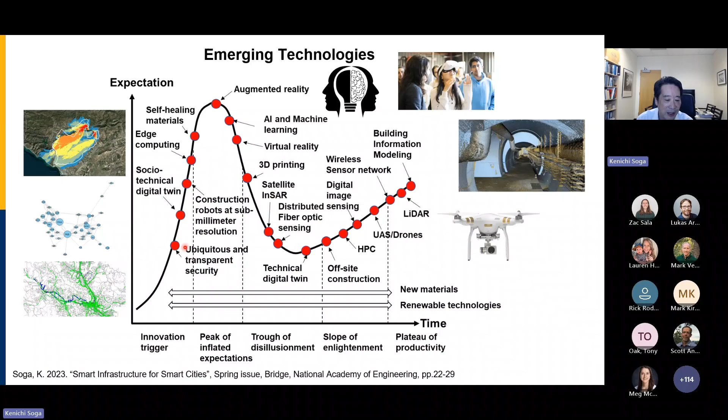Movement is something geotechnical engineers really want to know. Over the past 15 years, technology involvement like computer vision, LiDAR, and UAV gives you precision in the area of sub-millimeter to millimeter. Satellite gives you 10 to 20 millimeter, and fiber optic sensing, which I'll explain more, gives you about 10 microns to 1 micron in terms of strain.

And then we have WSN, Wireless Sensor Network - these are companies that spun out from our research group. You can see a variety of sensor systems that came out, but it's really about continuous monitoring at difficult-to-access sites. As you can see, these are the precisions that really matter in geotechnical engineering. So the technology has really come to the level that we can use it.

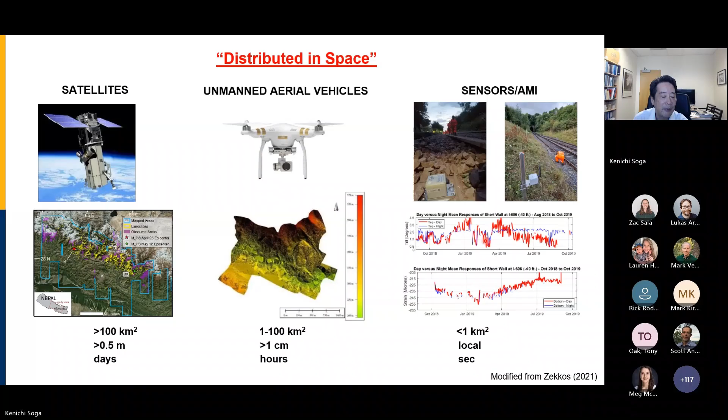I know BGC is working on this all the time in terms of distributing data in space - satellite, UAVs, and sensor or advanced metering infrastructure is what we do. This is from my colleague, Professor Zekkos, and you can see we go across different scales. For example, this is a wireless sensor technology we spun out 20 years ago.

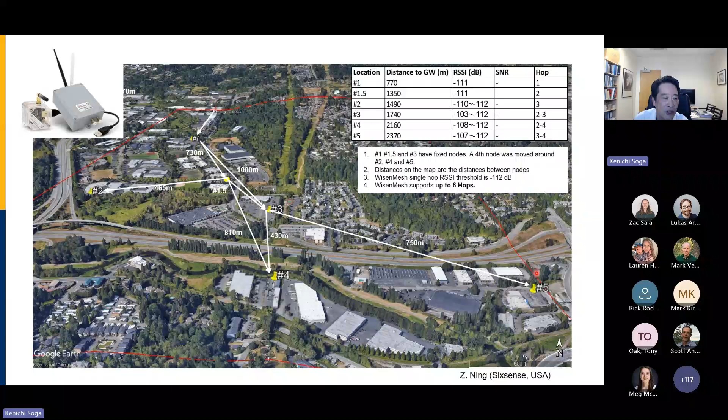And now it has come to a level that you can have a mesh network like what you have in your home with your Wi-Fi mesh network, but at a really larger scale in terms of hopping for kilometers, and you can cover a large distance using LoRa technology.

And the technology is really about bringing low sampling, but sometimes you need the data very quickly. So it's about distributing in time, distributing in space. In many cases, low sampling data rate is good enough.

For example, these are our systems where you have a battery, something like this. If you take hourly readings using a D cell battery in a mesh topology, theoretically, with a good battery, it should last for 20 to 25 years. This is where we spend a lot of time trying to make these devices really low power.

But sometimes you need a very fast sampling rate, like acceleration, noise, and wind. For example, the device over here uses vibration energy and scavenges that to get the energy to send signals.

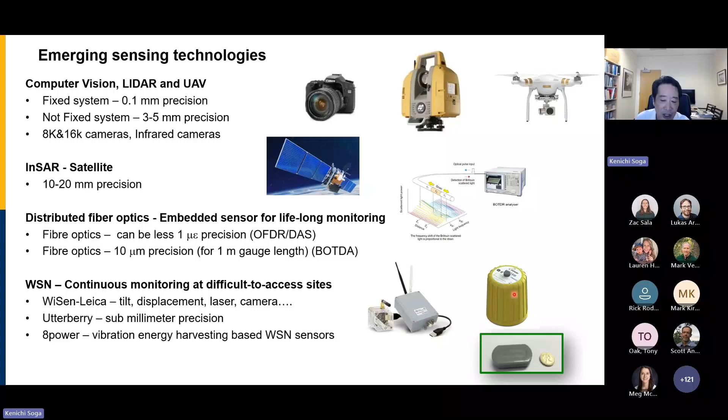But sometimes you can have a device that triggers when necessary—you see a little bit of shaking, and it allows you to trigger. That's how we save and try to get the data sets, because if you take a reading with very high frequency continuously, the battery will only last for a few days.

The question is which data is more important relative to the other, and how do you combine this data together? Machine learning allows you to look back and forth and figure out what is the most important one and how to combine this data set to look at the geological condition, for example.

How do you minimize the ground deformation? How do you make sure the building is okay? How do you run the machine autonomously? These are things we're working on. In the Rankine lecture I show several cases of this, but I don't have time today—have a look if you're interested in that particular part.

Now, in terms of monitoring, what is the value? There are two approaches. Approach one is our traditional way: set a safety margin, managing safety by snapshots. So we always do factor of safety or probabilistic analysis, based on an assumed failure mechanism.

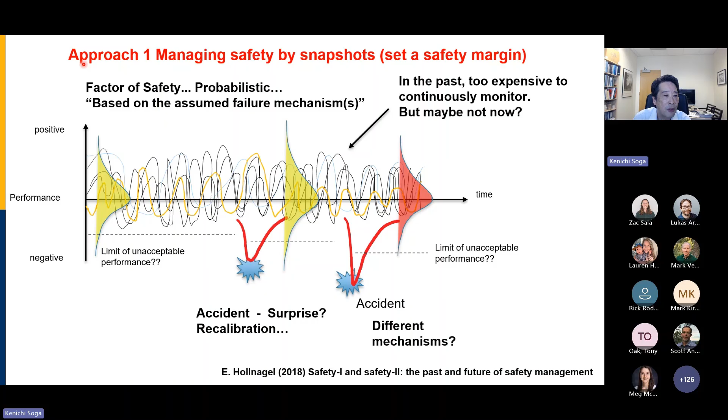However, in the past, it was too expensive to continuously monitor, but maybe not now. This is what approach two is about: managing safety by everyday work, real-time monitoring. It really comes from Professor Hollnagel, who works on safety management for hospitals, nuclear power plants, and similar things.

Approach one is the more classical one, but approach two is about monitoring, learning, anticipating what's going to happen, and responding quickly. In other words, you keep monitoring—you may see some signature of an accident starting to happen, but you can stop it, making proactive management of your infrastructure.

So if you know the actual performance—this is really about monitoring and knowing the actual performance—you learn how to respond quickly if an event begins to unfold. You manage future unknown demand by reducing unknown risk.

You may see something like climate change start to happen, something we didn't think about during the design stage, but it allows you to adapt and identify potential improvements in design and construction. If you know the actual performance, you can improve the way you do design and construction, so you have more economic infrastructure.

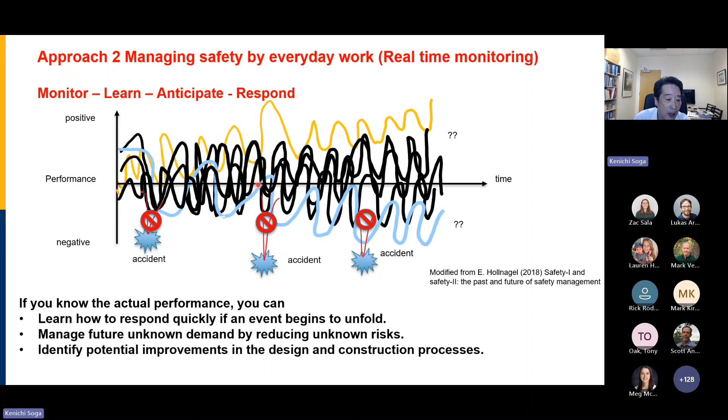And finally, it may lead to circular economy, resource conservation, component reuse, and sustainable design—in the sense that at end of life, can I reuse my piles because they're still useful for the next generation of building coming up.

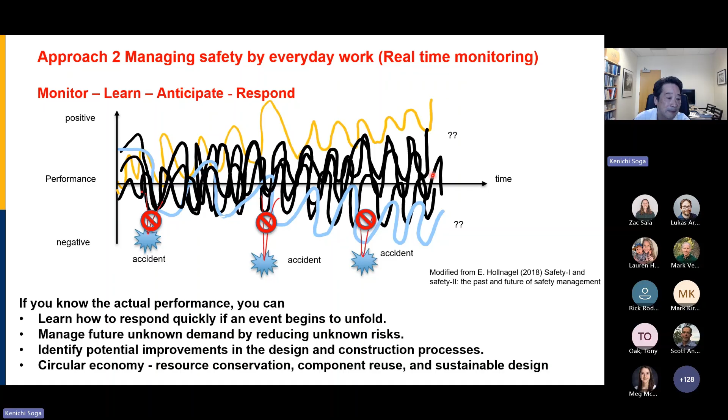Now, when we talk about measurements, we talk about Peck's observational method from his ninth Rankine lecture. I'm not sure you've read it, but when you read it very carefully, you start to realize Peck's observational method is not just about observation. He has a design philosophy behind this, and I want to go through it a little bit carefully, because I think it's a very important concept that we should understand, what the formal observational method is about, what Professor Ralph Peck proposed.

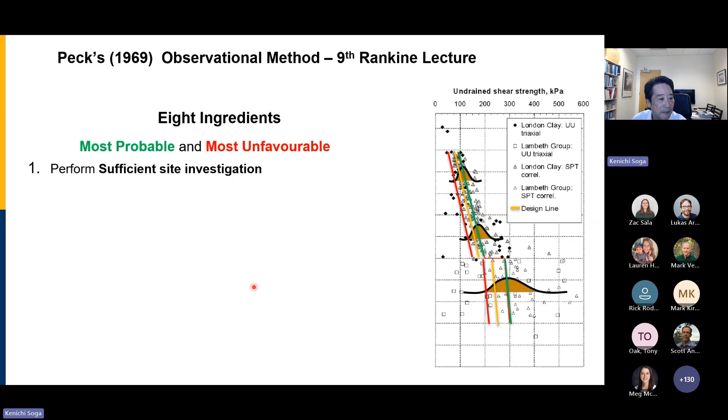Professor Peck doesn't use that yellow line. He says perform a sufficient site investigation, assess the most probable and most unfavorable conditions, which is green and red, and then establish a design based on most probable anticipated behavior. So he's saying use the most probable parameter and then start thinking about your 50-50 and design based on that. Obviously his interest was deep excavation, temporary structures, but that's what he said. Do that, and by doing that you save materials because you have a more proactive design.

You do a design based on most probable, then select the monitoring parameters and calculate the anticipated values. That is your 50-50 anticipated values. Then calculate values based on that design for the most unfavorable condition — what is likely to happen. Then you have a design option B that allows you to proceed if your design A starts to go wrong, and what kind of things you need to add during construction so you'll be safe. Then you monitor and evaluate actual conditions, modify the design to suit actual conditions, adopt design B if necessary. So this is the observational method that Professor Peck utilized and proposed.

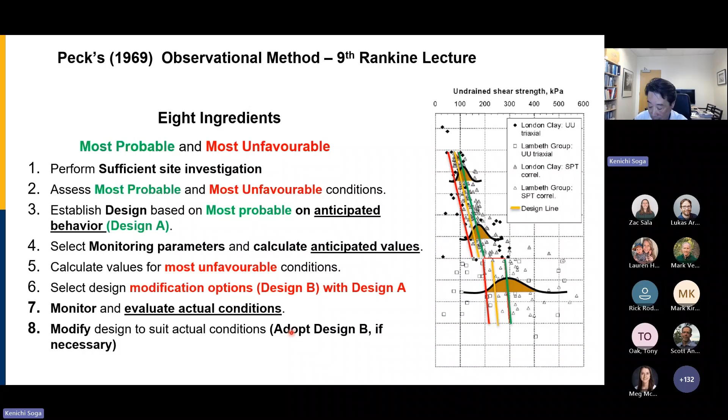Now, looking at the parameters, you may look at the horizontal axis like your drained stiffness, strength, or friction angle. You may have some distribution — it doesn't have to be normal, it can be log normal, but the point is you do have a distribution. Most probable is something like your 1 in 2. Most unfavorable may be 1 in 1,000, which I think may be the case. Structural engineering tends to pick 1 in 20. Geotechnical engineering tends to think a bit more like one standard deviation. We call it cautious characteristic parameters, and that's what we tend to use in design.

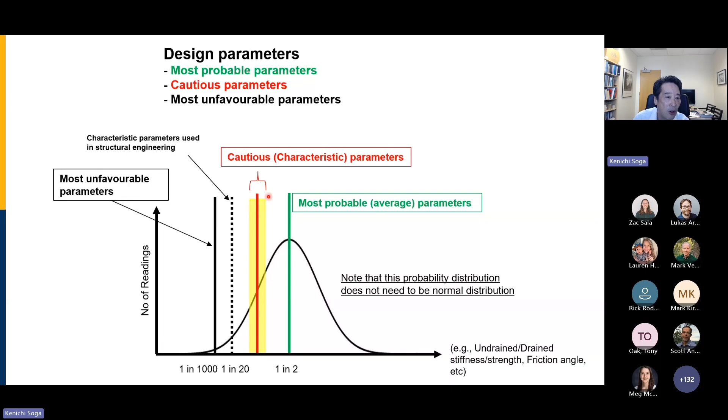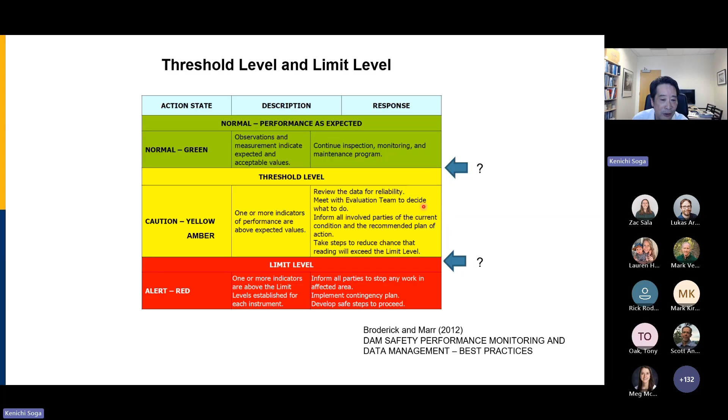So this is how you design, and this is probably what you do all the time. But I just want you to think about that as characteristics — I'm going to call it cautious parameters. So that leads to, when you do monitoring, how do you define the boundary between green and yellow, or amber if you're in the UK, and then yellow and red? What is the boundary? You can think a little more systematically about this.

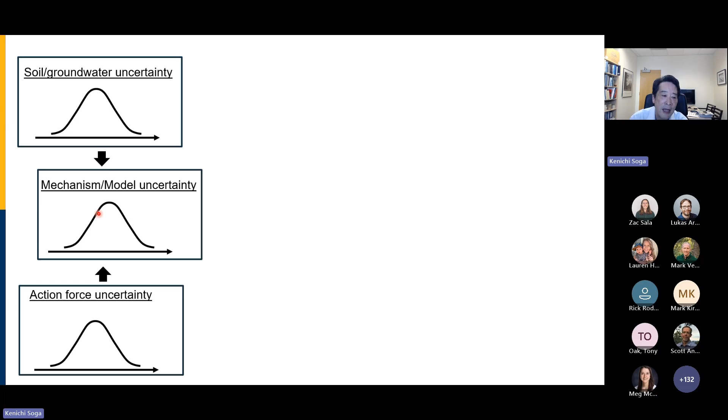Obviously you have soil groundwater uncertainty — this is what geotechnical engineers are good at, trying to figure out what that is. Structural engineers think about what is the action forces uncertainty. Sometimes we need to think very carefully about what is your mechanism and model uncertainty. Maybe you're using a closed form solution, maybe a sophisticated analysis — there must be an uncertainty in the analysis method and mechanism that you pick. You all know that construction creates, even after design, uncertainty in terms of performance. All these come together in terms of the performance.

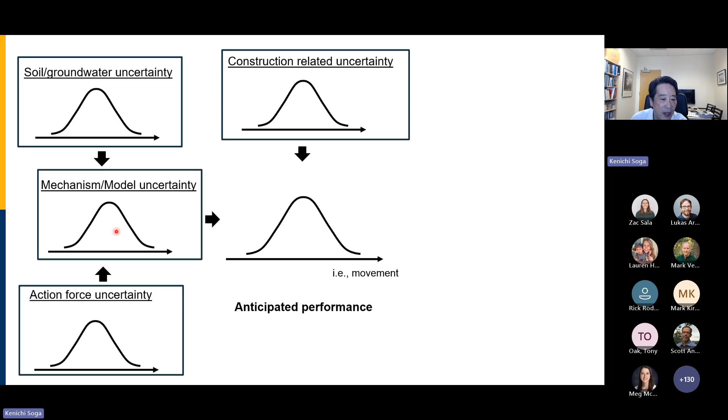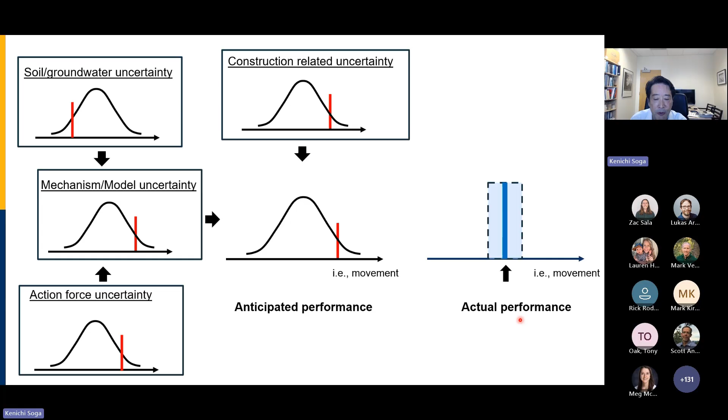Let's say this is the movement of something, of the ground or retaining walls. Then you have this particular distribution, and you must be thinking about this by combining all those together. Obviously in design you tend to be conservative in a certain way, and then you have a conservative threshold. Now come the movements, and then you have monitoring. Monitoring will show actual performance. You always need to compare those, and that's what geo-monitoring is about. You always need to look at the precision and data error in terms of your sensor, make sure you know the error or precision of your data sets, and then compare where you are.

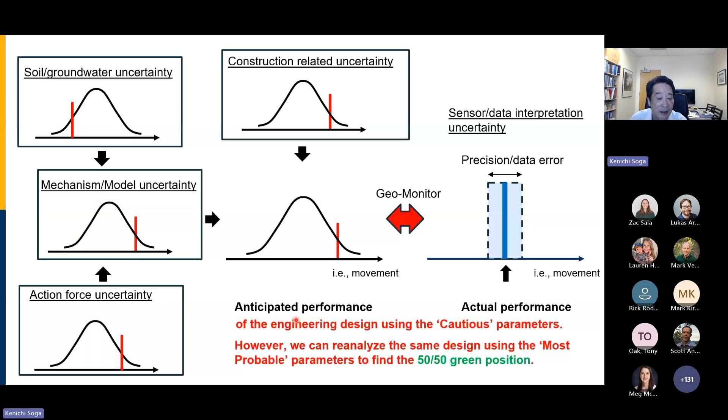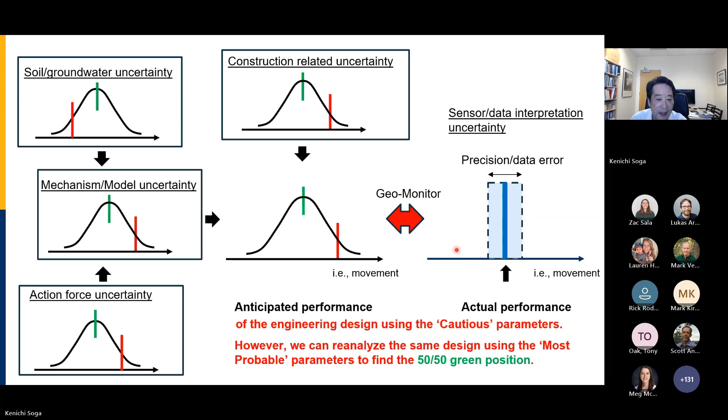I'm sure you do this red line all the time, but my proposal is to use the cautious parameters for engineering design. However, we can reanalyze the same design using the most probable parameters to find your 50-50 green. So pick your 50, pick your 50-50. By doing that, your good 50 is your green, between green and red is your yellow, and beyond that is your red.

You may have an emergency trigger depending on the seriousness. But the point is you can ask: are you in the green zone? Are you better off in your better 50-50? Or are you on the worst, not-good 50-50? Or if it goes beyond your red, you have to move very quickly.

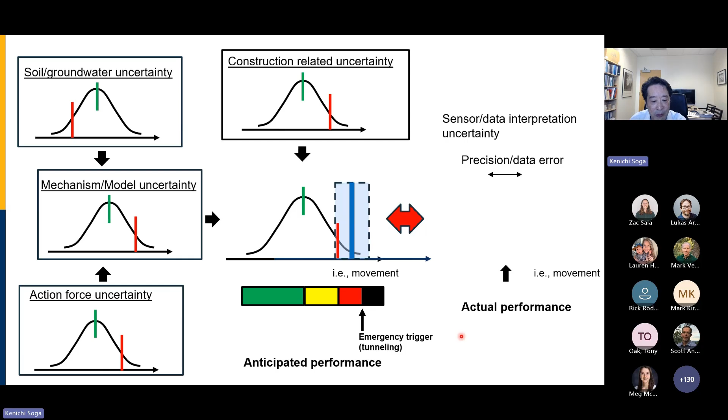So today's talk is about demonstrating how emerging distributed sensor and data analytic tools can contribute to this framework by seeking to understand the actual performance. I really want you to think about your 50-50.

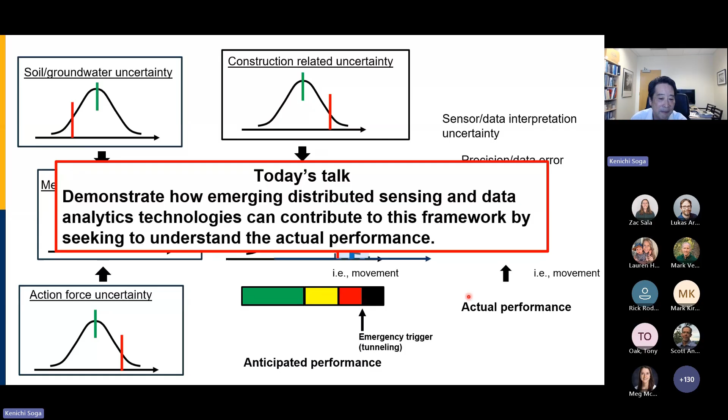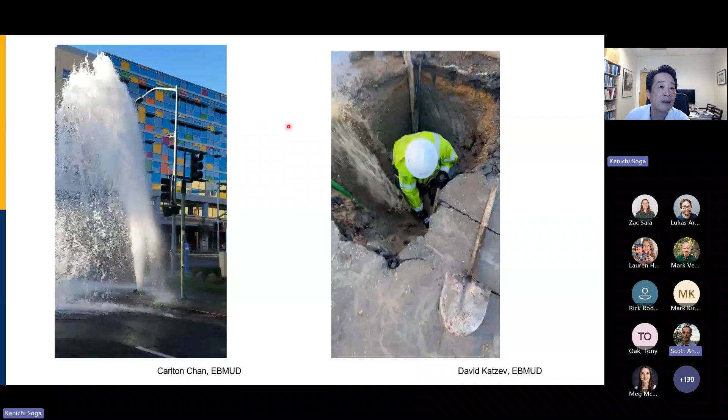I'm not sure you can hear the sound. Scott, do you hear the sound or no? Oh, no, I'm not hearing any sound. Is it okay now?

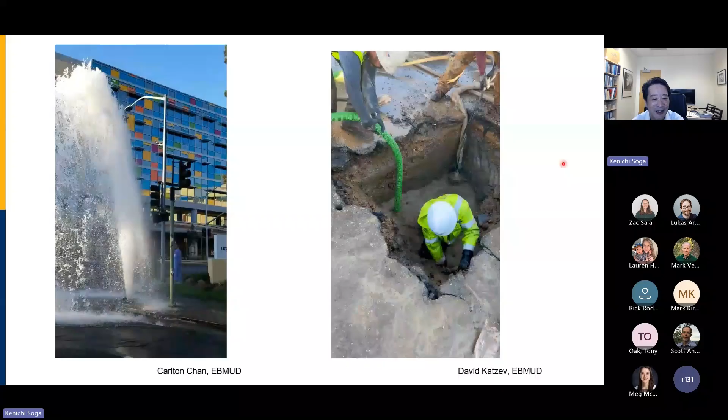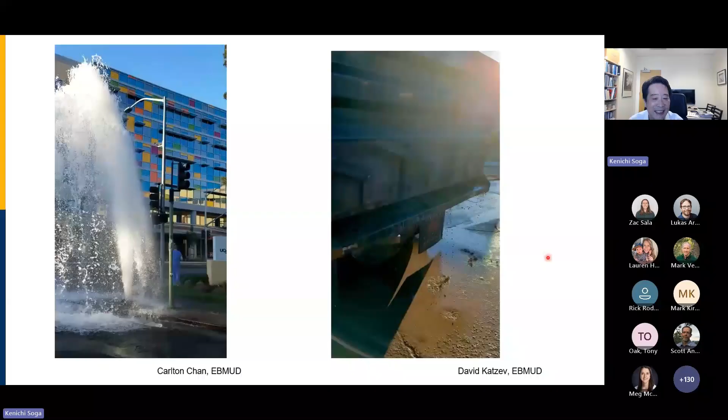So I'm talking a little bit about water leaks and water bursts and all these things right now. I just wanted to show you guys some of the real things, and it would be nice to have a robot doing this particular work—that's my dream for 20 years from now. But we'd like to see what's going to happen because it's tough work.

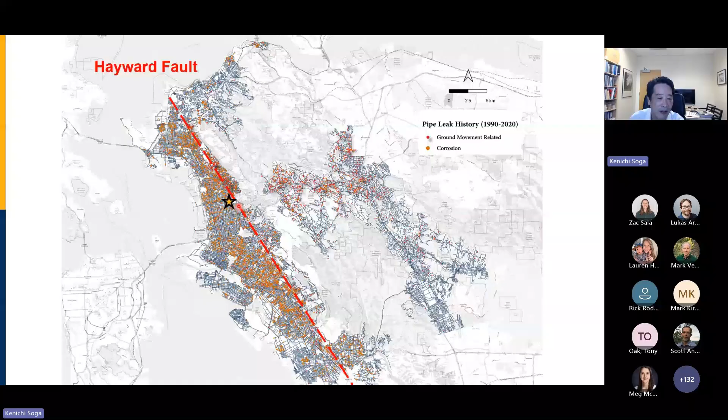I can't talk about this today, but we do research on AI, machine learning, and all these things—can we predict when the pipe is going to break? So that we repair it just before it breaks, and therefore there's some good economy to it.

Now today I will talk about fiber optic sensing. Some of you, and I know the BGC work on this as well—you have a standard optical fiber, the kind used for telecommunication. You shoot a light, and a small light comes back at every point, called backscatter light.

I know where the backscatter light came from because the speed of light is constant. If you time it, the light coming back earlier is the signature closer to the interrogator. If it's further away, it takes more time to come back, but that time is really, really quick. So you can get real-time monitoring of temperature, strain, and vibration.

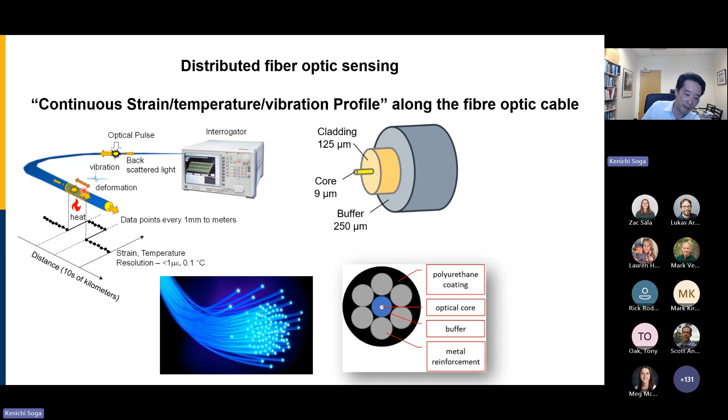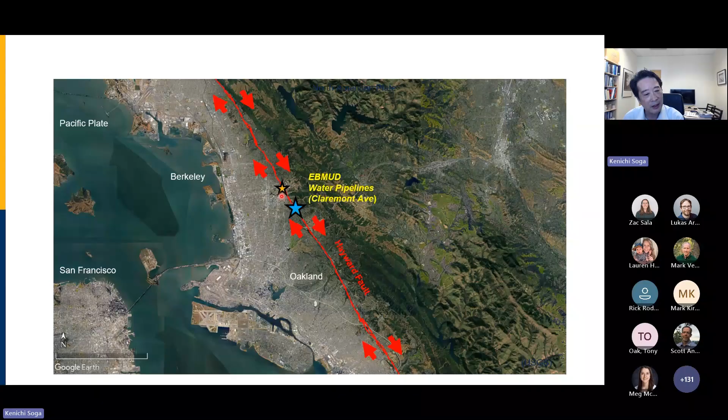Using this technology, which we've been working on for 20 years, let's look at an example. This is the East Bay MUD water pipeline network. Here we go down a little bit south from our campus. I'll first show you the pipeline network near the campus.

This is our campus, this is the hill going up, this is the top of the hill, and it goes down the other side to Orinda. We have a water treatment plant here, which brings the water through the tunnel to here. Every day we bring the water to these tanks at 150-meter elevation to have enough pressure for what we call the pink zone.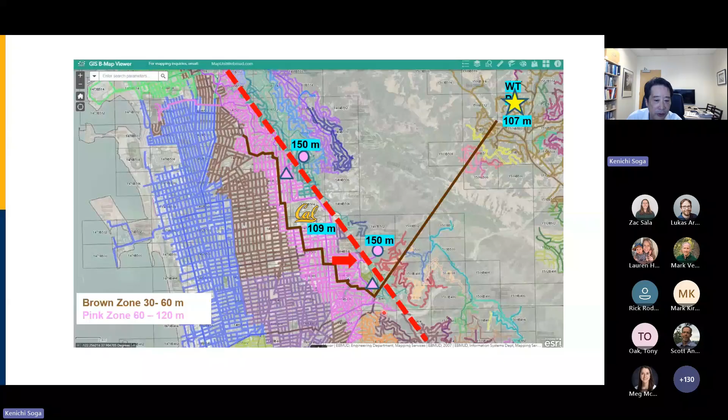If you look at these pipelines, unfortunately, they cross through the Hayward Fault. This is one of the sites where we used fiber optics to monitor. So again, this is the Hayward Fault—I'm zooming into the location right over here.

What you see is this particular part with the Hayward Fault. The left side is moving north, and the right side is moving south, about 4 or 5 millimeters every year. We attached the optical fiber on this pipeline as well as in a trench—these are the cables that we attached.

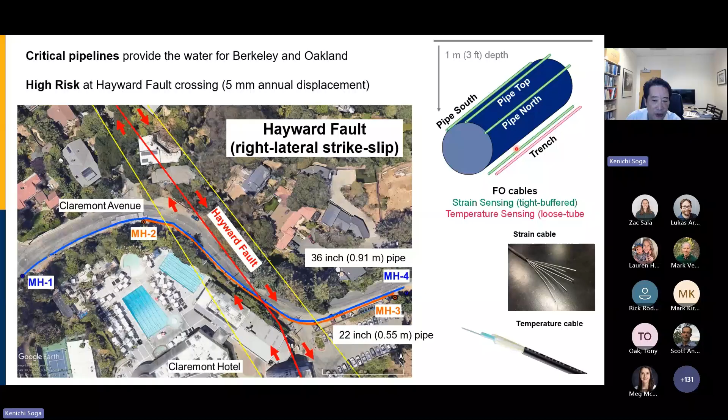I hope you see the movie. Is it okay? You see a trench and the pipe?

Yes, and then we see 3 lines where we attach the optical fiber under the tape, and the tape is really to make sure it's a straight line, and then it's inconsistent. But then we also inject epoxy at intervals to adhere the cables to the pipe. By having 3 cables, we can see the bending and axial deformation of the pipe.

This is the animation of how the strain is developing in the axial direction with time. In the summer, it expands a little bit. In the winter, it shrinks a little bit. But then with time, you see a more localized strain across the Hayward Fault. The magnitude is about 100 to 200 microstrain.

Small, but you can start to see some distortion of the pipe, or elongation of the pipe, as the left side is moving up and the right side is moving down, creating that 4 millimeter per year movement.

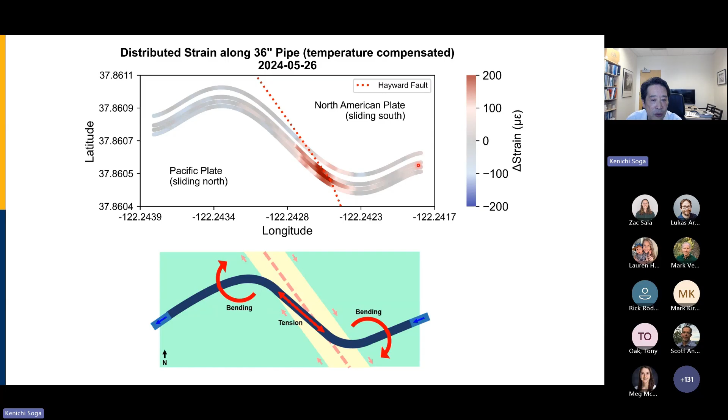Now we have a distributed strain, so that means I can integrate from one end, assuming it's a fixed end, and integrate the strain in the longitudinal direction to see how much stretching you're having on this particular pipe. This is what you see. This is the fixed end. I'm just integrating that strain to make a displacement profile.

During the winter, it sort of shrinks due to the thermal contraction. During the summer, it goes up a little bit with expansion, but you start to see a more exaggerated displacement profile on the fault zone, which is your 4 millimeter.

The error of this measurement, the measurement precision, is about 40 microstrain, and we developed a closed-form solution of how that error propagates. You may not see it very clearly, but there's smaller shading over here, and more shading on the right, because as you integrate, the error propagates further to the right. But the error is really, really small. So in a sense, we believe this particular movement is real.

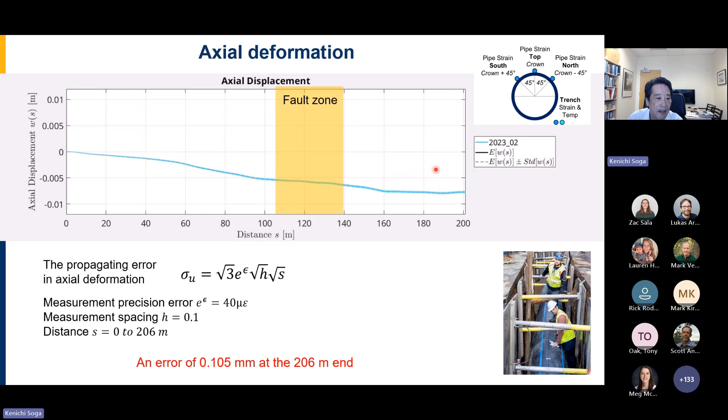So if you extract that particular seasonal effect and remove it, and look at the movement by the fault movement only, this is what you see in terms of displacement profile from the west side to the east side, and you do see a 4 millimeter movement.

We also have a record from satellite movement for 20 years, or 10 years of movement, and when you average the movement for the past 10 years or so and do a statistical analysis, you do see that it's moving about 4 millimeter per year. But this is 1 year of data, while that is the statistical average of many, many years through the satellite. You can start to see the different scales that you can monitor using this technology.

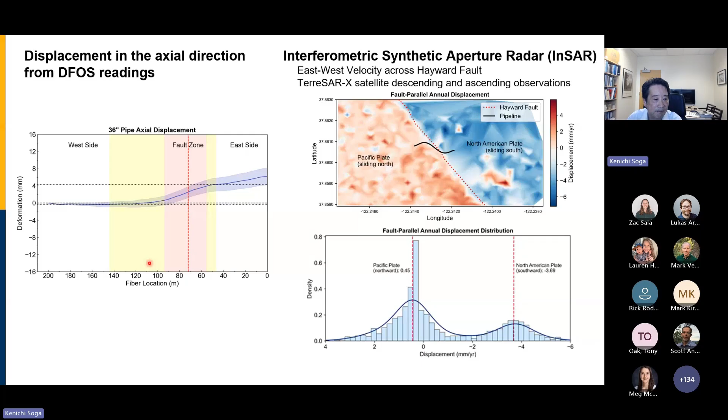Now, we also have a cable on two sides, so that gives us the bending strain. Once you have bending strain, you can integrate twice to get the lateral displacement. This is the sort of snaking of the pipe over time.

It really bothered me when I saw the data, and I kept asking the students, this should not be right. The reason why is that you see a movement of 0.1 meter, which is 10 centimeters or so, snaking back and forth. These are the errors. It's not the instrumentation error that's giving you this, because we theoretically calculate the error from integrating from two ends, and having that integration point, you have more error in the middle. But you do see this particular interesting snaking movement, and it really bothered me a lot.

When I looked at the trench, and talked with the students, the research team, and contractors about how they backfilled it, you can see it's difficult to compact the two sides.

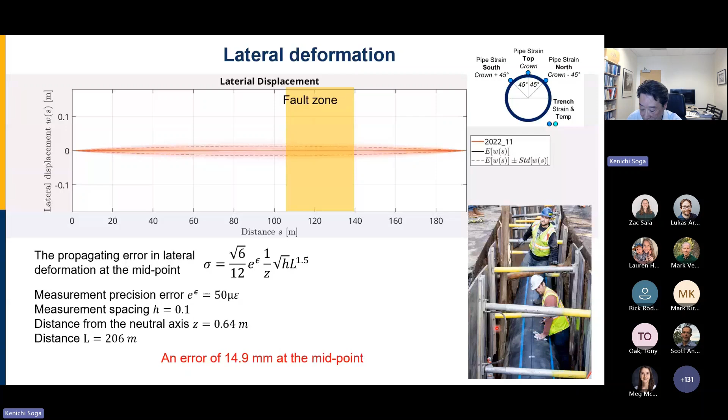So what I realized is that perhaps the temperature in the pipe, shown over here, can be different from the ground temperature every day, because every day you bring some water from the reservoir, and it may cool or become hot depending. So the temperature in the pipe may be different from outside. You see the temperature of the water inside going up and down, and obviously that will give you interesting behavior because of the curvature of the pipe.

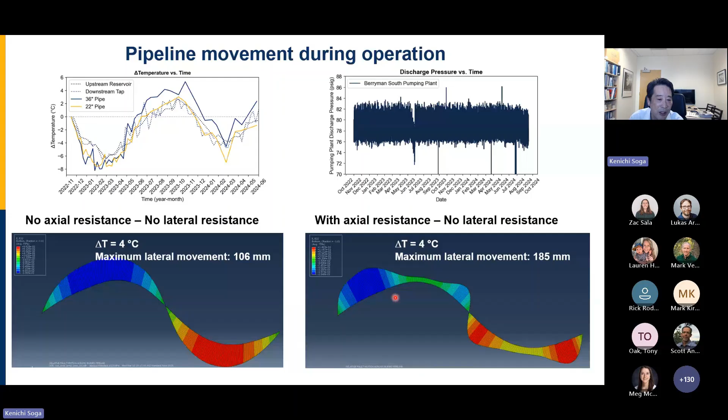When the thermal expansion happens, it just does snaking. If I have no lateral resistance, meaning no soil lateral spring and no axial resistance, which is probably not the case, but no axial spring, and I apply thermal expansion to the pipe, it does move 10 centimeters, or 100 mil. Obviously you have axial resistance because the pipe is sitting on the soil, so axial resistance may be larger, but you do see some lateral movement. So we start to see some interesting mechanisms that we don't think are real, but are really interesting.

So we have a California Energy Commission project to showcase how this distributed strain can be used in practice. LiDAR gives you distributed ground movements, and fiber optic can give you distributed strain. You do your initial study through the lab and design, but then can we update the parameters and really confirm the mechanism you assumed in your design is correct? If you do that, you'll learn how your pipe is behaving, and then you can make a better decision to replace it.

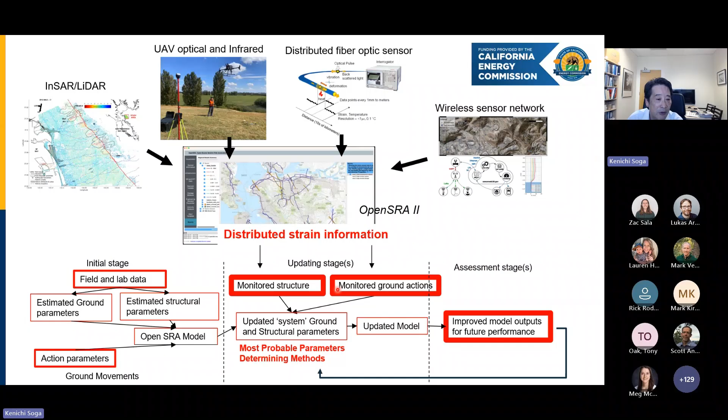For example, that plastic pipe, the HDPE pipe you saw previously on the Hayward Fault, is designed to withstand movement of about 7 feet. But the point is, if it moves after an earthquake, you can start to ask: what is the residual life of this particular pipeline? So it gives you an idea of when to replace it.

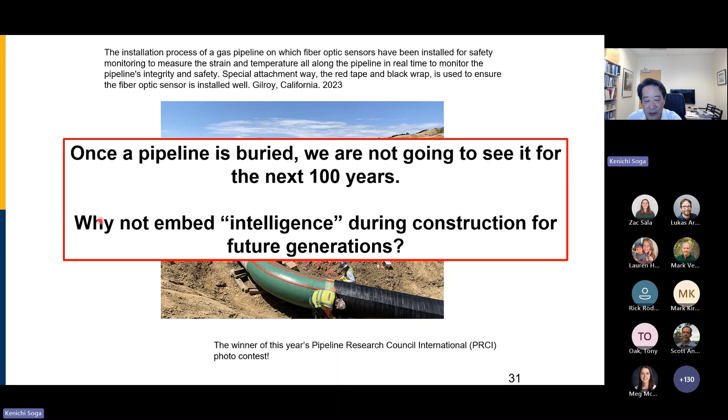Here's another case of a pipeline for PG&E. So you see three lines. The point is that once a pipeline is buried, we're not going to see it for the next 100 years. So why not embed intelligence during construction for future generations?

We're using that for fiber optics in pavement. So you can see a pavement with fiber embedded, and then you see a person running, and it becomes like a touch screen.

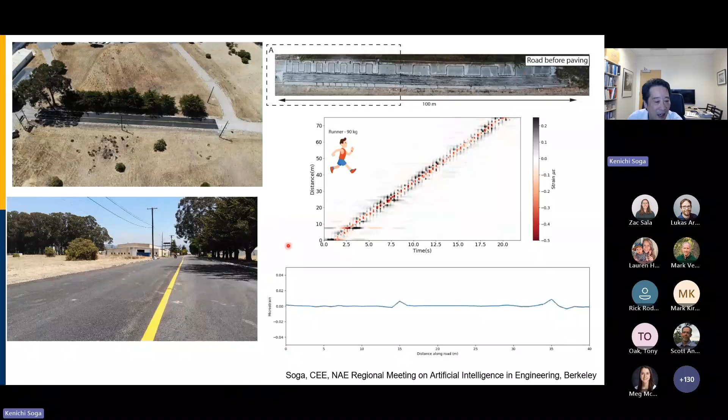We're working with car manufacturing companies, Caltrans, and others to see if we can make roads safer by having smarter infrastructure.

Here is people moving, and this is water flow using distributed acoustic sensing. We do real-time mapping of how people are moving. Maybe in the future I can see, oh, Scott walks this way, so I can recognize it's Scott, because Scott may walk in a certain way.

You can do geophysics, which we're very familiar with, especially to find the water table for liquefaction analysis.

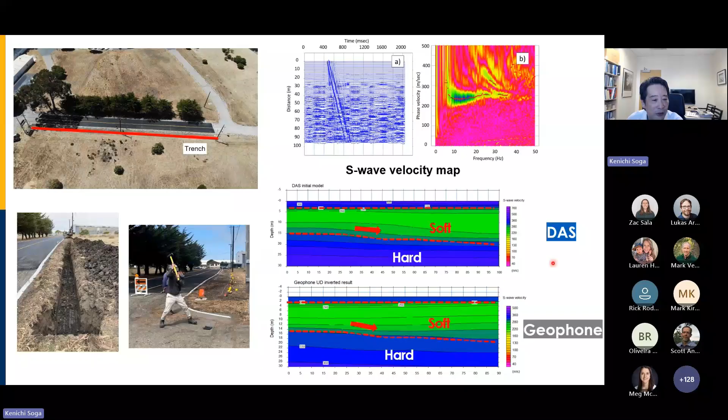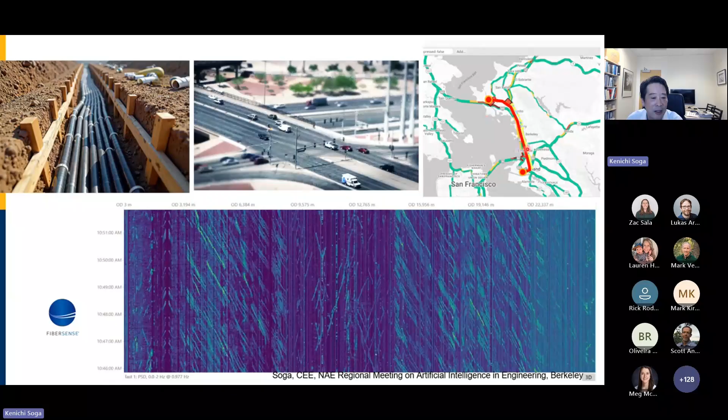Fiber is already in the embedment, so we use dark fiber for about 20 kilometers from Richmond to Oakland, and we monitor one of the roads using distributed acoustic sensing, where fiber is already embedded in the ground for communication, and we borrow one of those lines to do that.

We also do something offshore. We have a cable that is listening, and this is a project where we have a whale singing, using our cable as a microphone to listen. Maybe you can hear the sound of a whale singing in Monterey Bay. Our researchers love this particular project because it's a fun one.

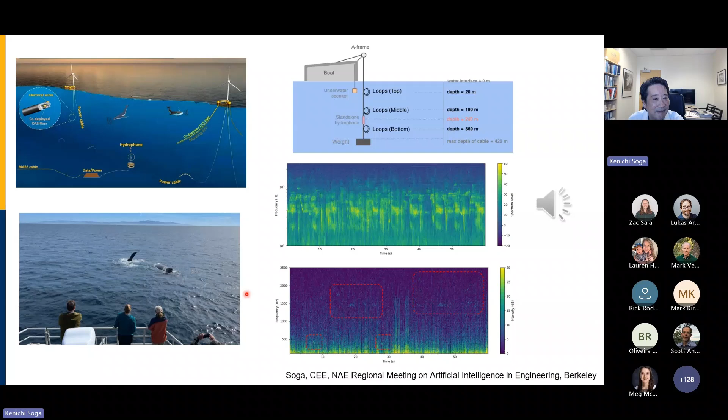Here's another one near our campus. We bury a pipeline with a cable attached, and we really want to look at leakage detection. So here we have a cable being attached and buried, and after that we create a fictitious leakage, starting with a small leak. I'm going to be quiet—maybe you can hear the sound.

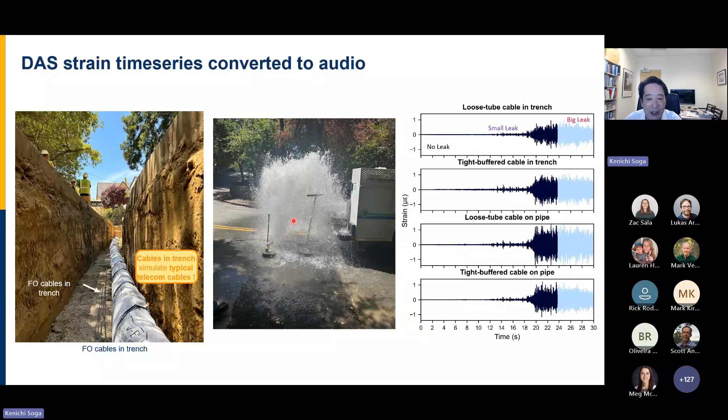And now we have a bigger leak, like this one. It's obvious now, but what we really want to figure out is how this cable can be used effectively.

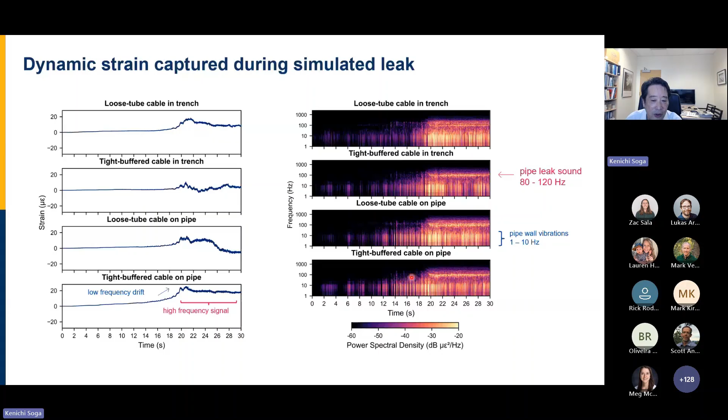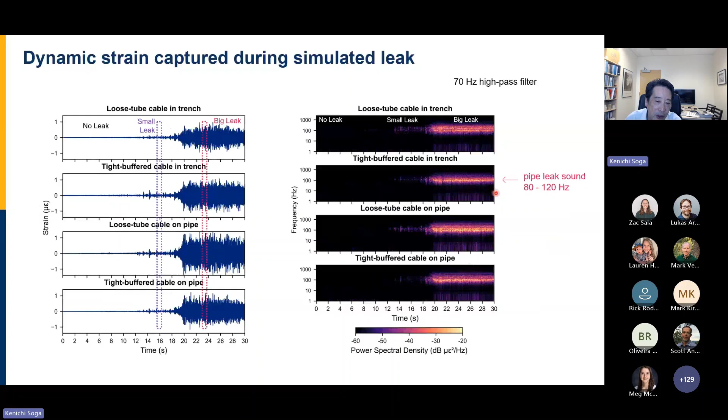You can look at the frequency of the cable over time and see that pipe leakage sound is about 80 to 120 hertz. We're looking at different cable types in the trench or the pipe. At the same time, when the leak happens, the pipeline vibrates, so you can see the pipeline wall vibration in the 1 to 10 hertz range. You can filter it if you want to isolate the pipeline leak sound.

Scott, how am I doing? Should we stop, or do I have one more case study that I can cover in about 5 minutes, and then we can finish off? I think that's okay—if one of my colleagues wants to correct me, please do so. But I think it's okay, Kenichi.

Okay, I just wanted to give you one example. This is not in the Rankine lecture, but it's a pile shaft where we put fiber optics to measure. This is the CPT data looking at silty clay, sand, and dense sand, and silty clay.

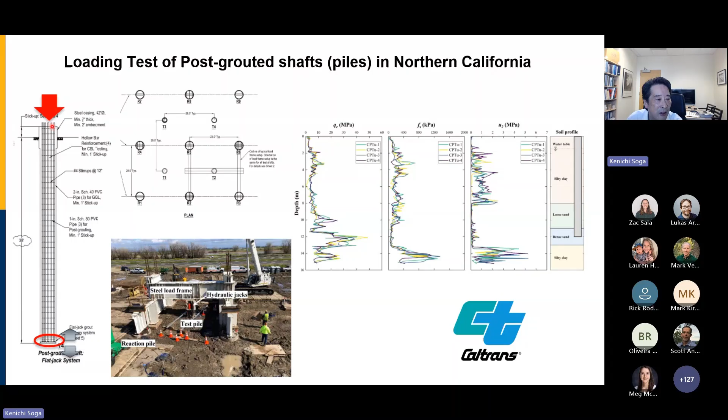This was a post-grouted shaft test, but I want to show you after this is done, when you apply a load, what is the strain distribution within the pile. Here's a pile with strain gauges, typical vibrating wire strain gauge. We have a fiber optic to measure the temperature during curing, which I can't show you today, but strain cables.

If you apply a load, strain will be the largest at the top and decreases as you go down. And this is the typical load displacement curve. We had 4 piles, so these are the typical load displacement curves.

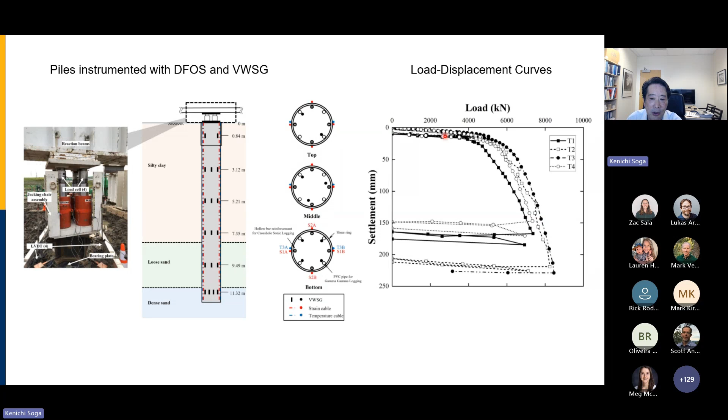Now, this is the strain gauge data that we have at the level of loading of 1750 kips. And then you have this strain gauge data over here. Now you look at this data and say, what is that particular data? You may say, I don't like this data, so I'm going to throw it away.

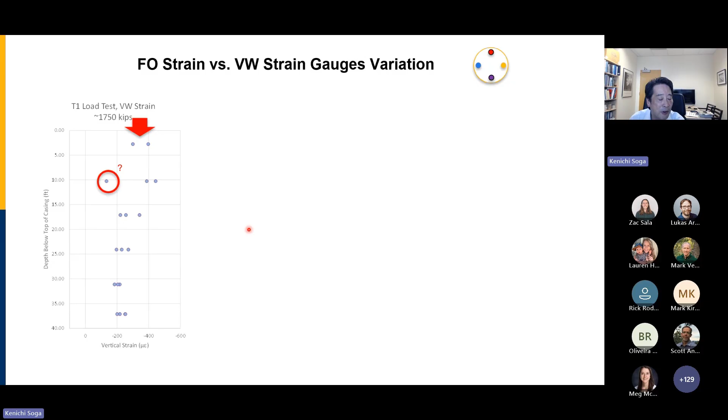However, when you look at your fiber optics data, actually this particular data is true. The purple line is one side of the pile, and the red line is the other side. In other words, the difference is the bending of the pile. This is the bending in this direction, but it's quite interesting - it's bending in one direction, but as you go deeper, it bends in the other direction. So in other words, this particular data is correct. It's just our assumption that a vertically loaded pile will never bend.

If you take an average of everything, it looks nice, and therefore you get a nice distribution of the strain, where the gradient is related to your shaft friction and the end bearing is related to the bottom of strain.

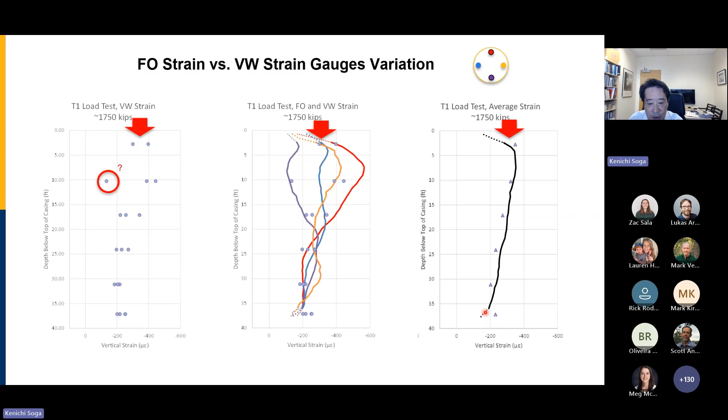This is for loading, increasing the load. So this is the same pile as you increase the load. All the data sets that you see in vibrating wire strain look good if you look at the actual data set with distributed strain. So this data set that we didn't like may be real.

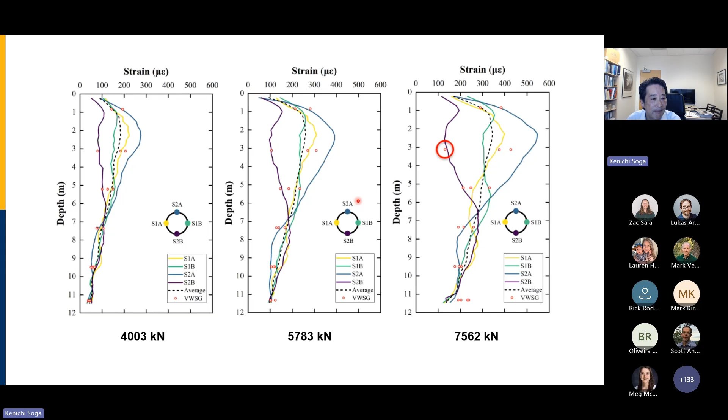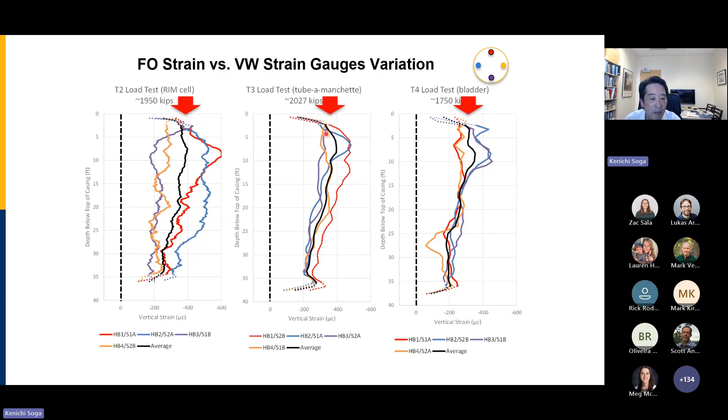You can integrate your data sets, and if you just assume there's a fixed bottom, then you can see how much bending there is - you can see it's only a very small movement of a few millimeters, it's bending, but you can see that, and that's the signature of the strain gauge that you see from the data sets.

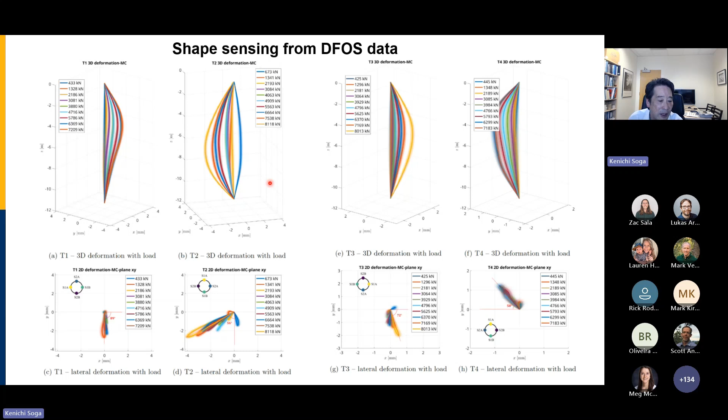In other words, your pile is not vertically drilled, so you can see the pile tip, shown in red, and the top head. So there's always an eccentricity, and that creates the bending of your pile.

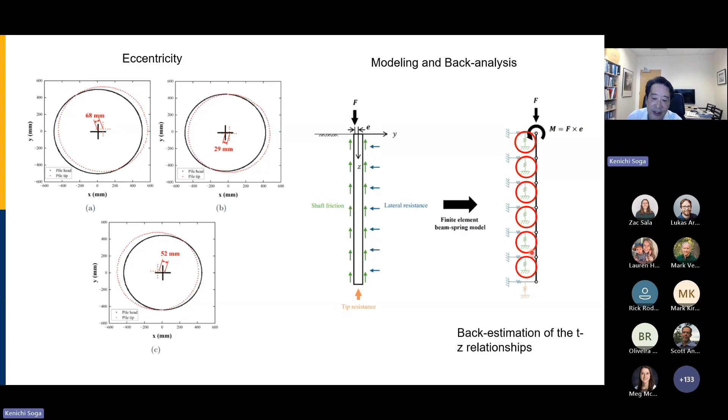So the question is, what are the important aspects of your shaft friction that you want to understand? You can do a very simple FE analysis, typically with a TZ relationship with end bearing, but I'm just adding an additional lateral spring. What we're trying to do is calibrate our TZ and PY relationship with our data sets - so back estimation of the TZ relationship.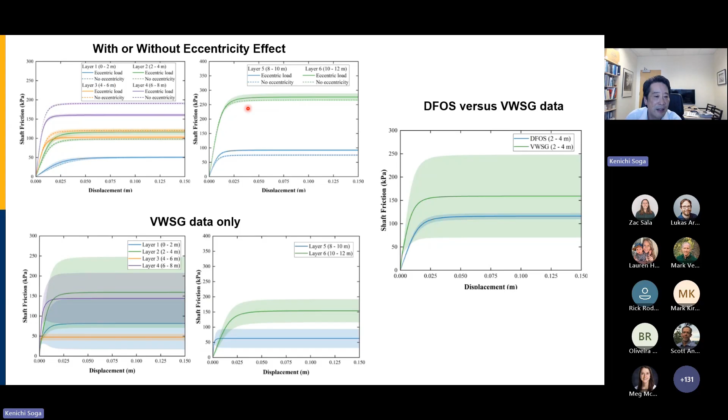Now, was eccentricity an important part of this particular derivation of TZ? In this particular case, the answer is no. The Tmax is your maximum shaft friction at the end here, and if we compare the two - with eccentricity and without eccentricity - they're very similar. In other words, eccentricity was not an issue in this case in terms of bending, nor in terms of deriving your TZ relationship.

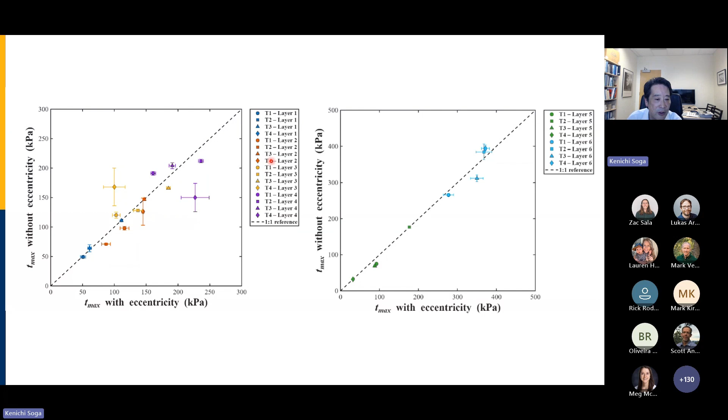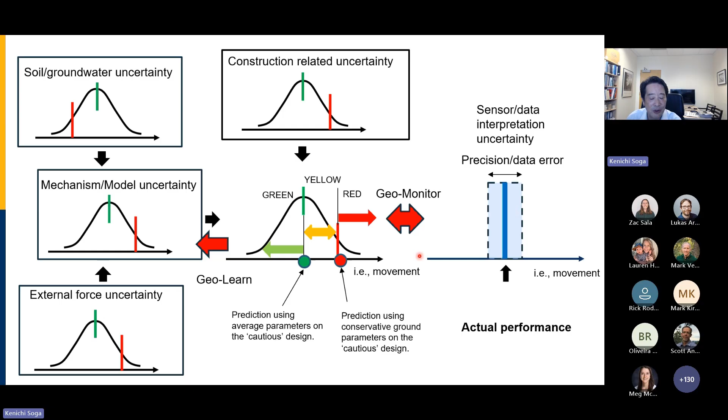So I just want you to come back to this one. Hopefully by looking at more data, you'll start to understand the real behavior. And I want you to start thinking about your 50-50. You can do that for your pile shafts. You can start to derive your green, yellow, red, maybe just for the load displacement curve if you don't have fiber optics. But if you have fiber optics, you can do it for every point along your fiber.

You can do that for retaining walls as well. You can start to predict where it's going, and you can start adding your support, and then you can keep on going. And then if you start to see you're always green, maybe in that case you say, maybe I don't need to have this final prop. And then without the final prop, I can excavate and save time and save money.

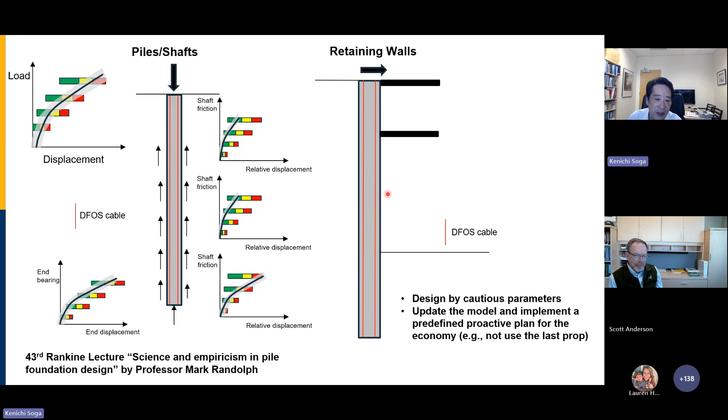And that is another way of looking at the observational method, which is not the classic observational method, but a new generation of observational method with a more conservative design, but you have a more proactive construction process. This is discussed much in the ISSMGE TC. There's a technical committee on this, and maybe you can join if you're interested as well.

So just to come back to this: if your analysis is always in red, that means you're not good. But if your analysis is always green and your measurement is always green, it means that you're over-designing, and maybe you need to think about how you're going to design.

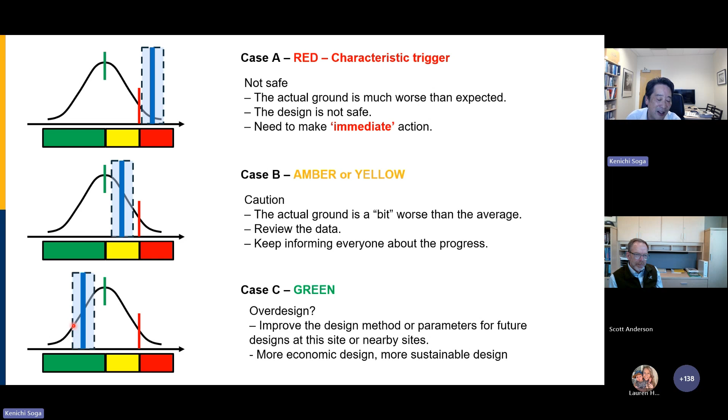So in summary, I think there's a lot of interest in sensors and data analytics. I just gave you an example of fiber optics. By having fiber optics, you can use it for quality control, maintenance, resilience against hazards, and reuse. But by understanding the actual performance of your geotechnical infrastructure, you can be more proactive in looking after your infrastructure. And that is what I call the new generation of the observational method.

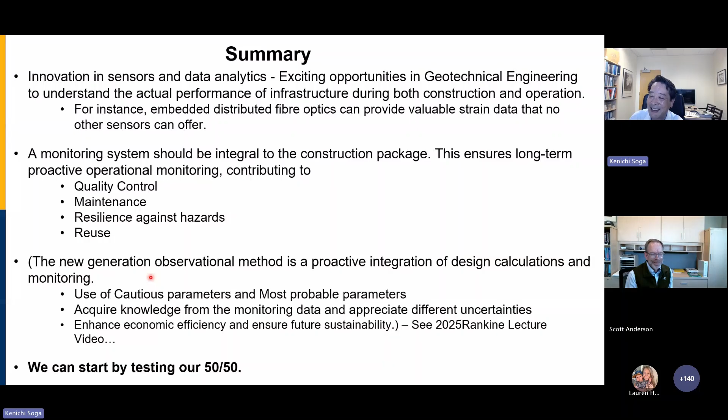Sorry, I went for a very long time, but I just want you to remember that maybe you can try your 50-50. You don't need to tell your client about your 50-50, but just talk with your friends and colleagues, and test your 50-50 every time you do your design. Thank you very much.

Thank you, Kenichi. And we don't have a lot of time left. I do really want to say that was a spectacular presentation. I'm always thinking of something - I have a list of many, many questions I'd like to ask you. Sorry.

But they can be for another day. We do a lot of work at BGC with fiber optics, of course, and yet when I see some of the work you present, I continue to think we're just touching the surface. Maybe one simple question for you, and just because it's your last example - there is this practice of thermal integrity profiling of shafts where temperature is used to give some indication of the diameter of the cylinder that you think you've put in the ground. Have you tried combining your work with that? Because maybe that's a short-lived technology.

Yes, and it's actually time to move that on. Thermal integrity testing is probably the easiest way to start with fiber optics, and most of our work is about thermal integrity testing. I did discuss this in my Rankine lecture, so you can look at it. But the point is that once you measure the temperature, you can also measure the strain. And what we see is some nice potential relationship between the diameter of the piles changing and actual strain development during the loading. So now you start to link your pile geometry to the actual performance of your pile, which helps you say how you can do a better design.